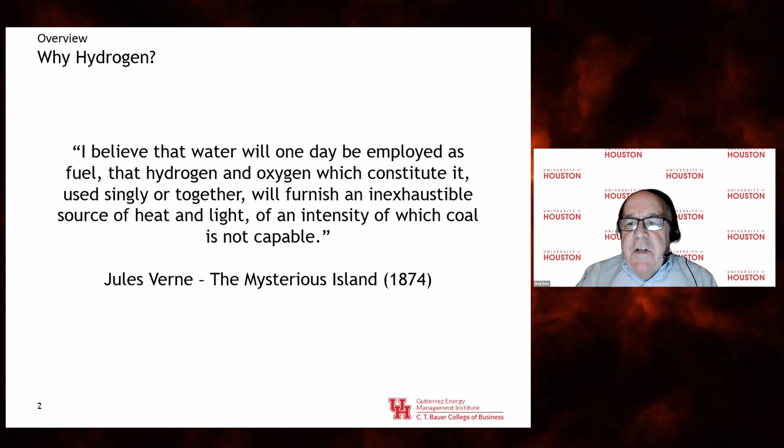Perhaps if I could ask if the mic in the room could be muted. Great, thank you very much.

So what is it about hydrogen that really drives our interest? It's obviously a very unique element. Its combustion process is very clean, producing only heat and water. It has a very high specific energy content, three times the energy content of gasoline by weight. That really drives our key interest in hydrogen, as its value as an energy carrier in parallel with electricity, and also as a storage medium.

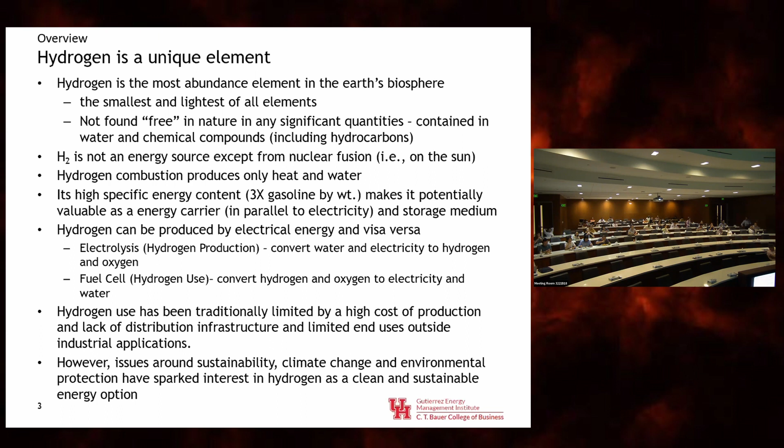One of the great things about hydrogen is it can be produced by electrical energy and vice versa. We can produce hydrogen by electrolysis, converting water and electricity to hydrogen, and then we can also convert hydrogen and oxygen to electricity via fuel cells.

So our interest in hydrogen has been... I'm sorry, is it possible to mute the mic in the room?

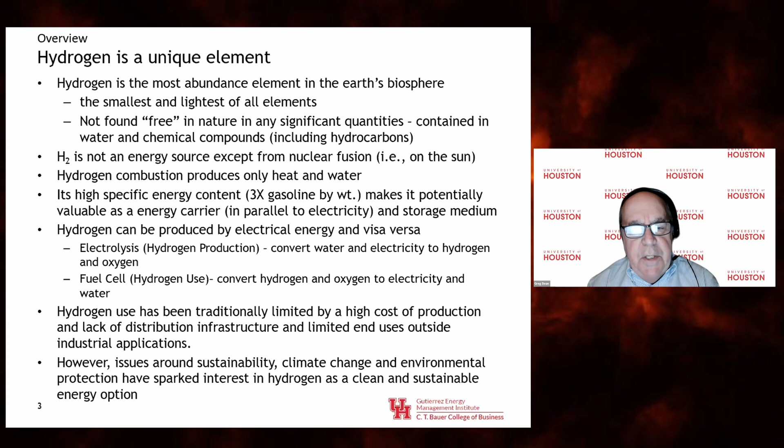It's been traditionally limited because of its very high cost of production, but now with interest in sustainability and climate change, we've come to focus on what role hydrogen could play. In terms of an overall role in a low or zero carbon energy world, we can talk about the full value chain for sources of hydrogen, whether zero carbon so-called green pathways, or blue hydrogen production from fossil fuels with carbon capture.

Energy storage and transportation are very important. Hydrogen can be moved and stored in a number of different ways, in different physical forms of hydrogen, as well as different hydrogen-derived energy carriers like ammonia, methanol, etc.

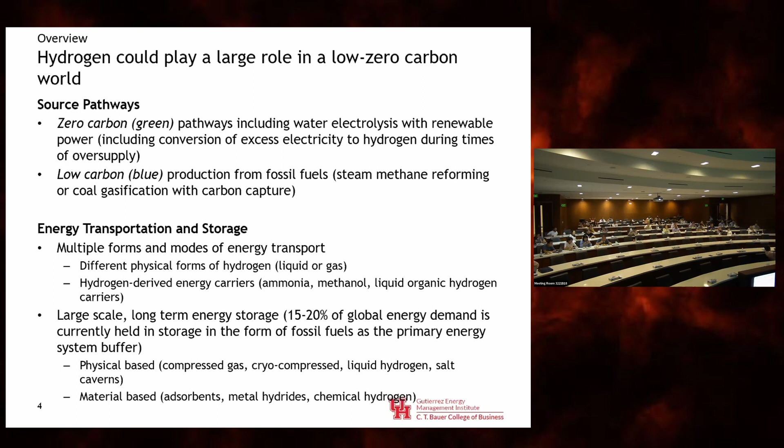One key important aspect of hydrogen is its potential role in long-term energy storage. One of the beauties of fossil fuels is that they are very energy dense and easy to store and move around. In fact, about 15 to 20% of global energy demand is currently held in storage in the form of fossil fuels as the primary energy system buffer. So as we move away from fossil fuels, we need other methods to transport and store hydrogen.

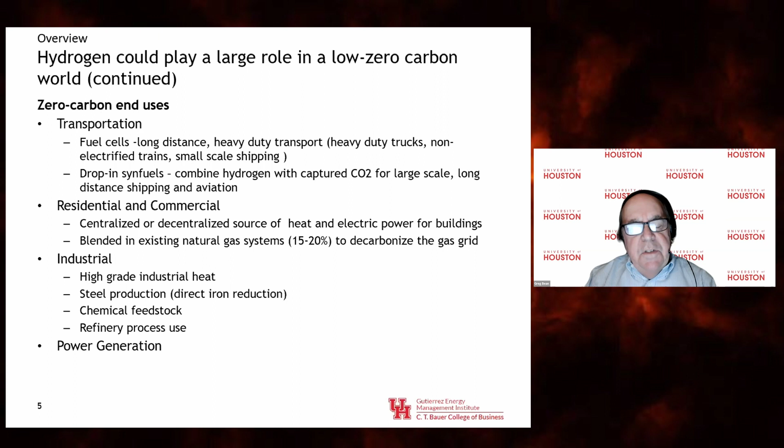We also need to think about the back end of the value chain, the different zero carbon energy uses. Part of the infrastructure has to be the introduction of devices that will use hydrogen in various sectors, whether transportation, potentially residential, commercial, industrial applications, particularly high heat and heavy energy intensive industries, as well as a potential role in power generation.

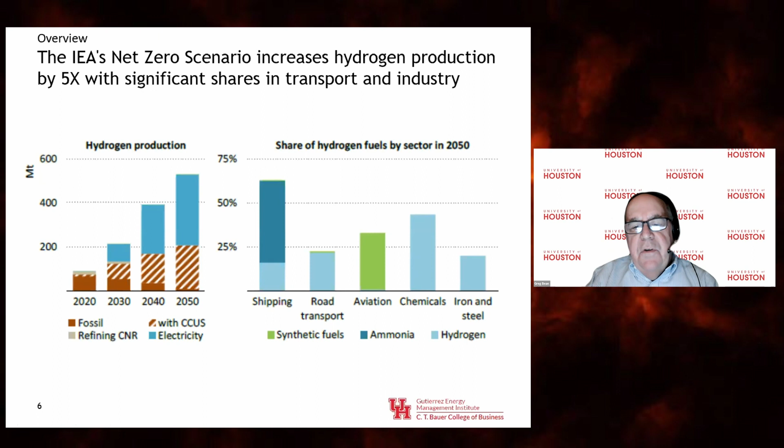Obviously the future role of hydrogen is somewhat uncertain, so it can be helpful to think about that in terms of scenarios. This is the IEA's net zero scenario, where they project an increase in hydrogen production of about 5x over the next 30 years, with significant penetration in transportation and industry, both in transportation in terms of shipping, heavy-duty road transport, aviation, and in industry, especially chemicals and iron and steel. We're going to need some technology development.

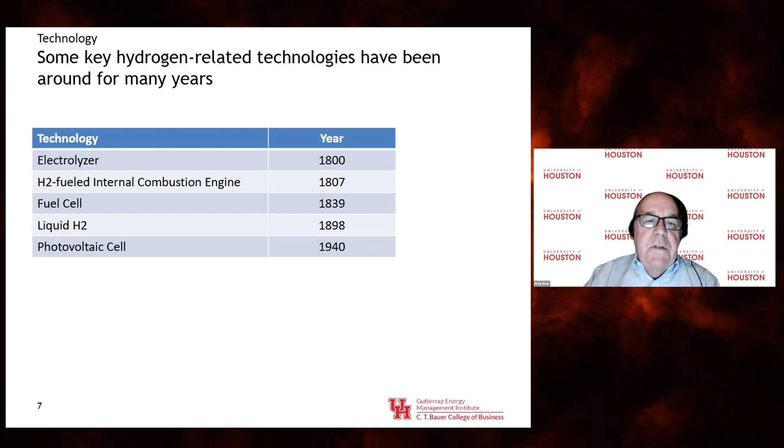The good news is that a lot of the hydrogen-related technologies that we need have been around in early forms for many years. We list some of these here, things like electrolyzers, fuel cells, and even PV cells for solar power for the electrolyzers. So while these technologies have been around for a while, they have not been really developed and applied at scale, which is the task that we have before us.

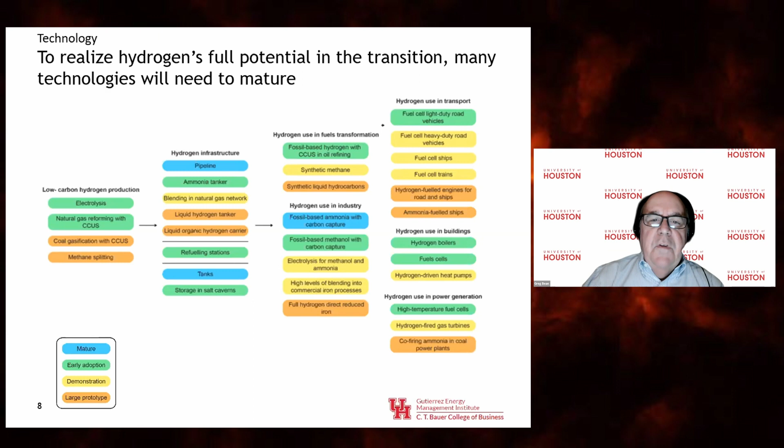You can see going on the value chain from left to right in terms of production, infrastructure, and then the different aspects, the different investments that we need and the different technologies that we need in terms of the various potential uses of hydrogen.

When we talk about hydrogen, people tend to talk about different colors of hydrogen - gray, blue, or green - but I think increasingly people are going to focus much more on the carbon intensity of the hydrogen: how many kilograms of CO2 equivalent are incurred to produce a kilogram of hydrogen.

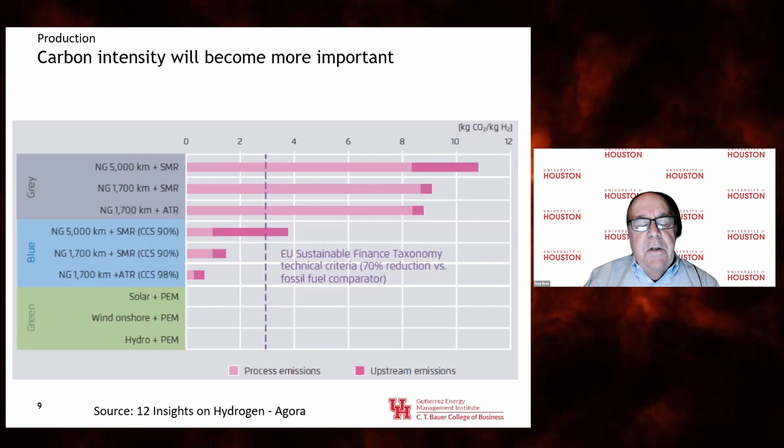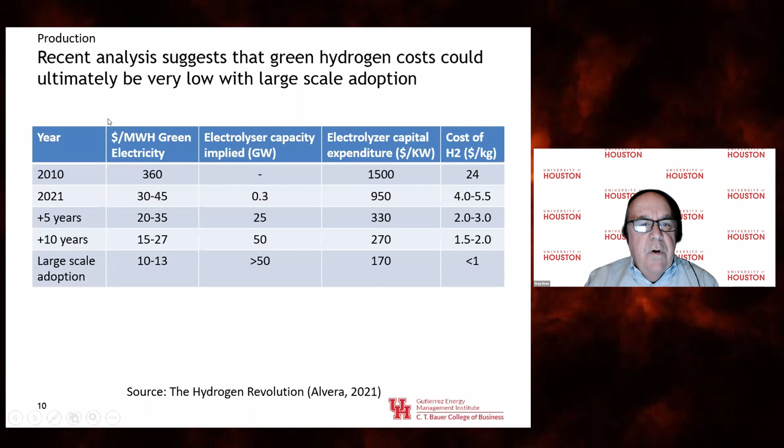There's been a lot of development and thinking about how cost might evolve. This is some interesting analysis done recently, which suggests that as we move over the next 20 to 30 years to large scale adoption of green hydrogen produced by electrolyzers, the capital cost and hence the implied cost of hydrogen could drop very dramatically from $4 or $5 a kilogram today to potentially $1 a kilogram or even less with very large adoption.

When we think about the demand for hydrogen, there is potential demand in all of the end use segments, but hydrogen will probably find its best markets and penetrate more highly in the more centralized applications where it will have some advantage versus electricity. When we think about the new low carbon, zero carbon world where we're moving from the use of fossil fuels to primarily electricity and energy use, either through electrification or hydrogen, we then need to look at which solution is likely to be best.

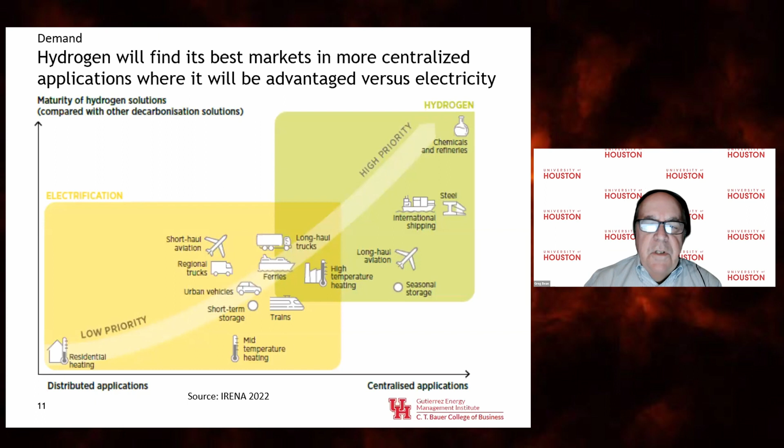As we can see here, the focus for hydrogen is on some of the transport sectors as well as the industrial sectors. We see probably less use in buildings and in light-duty transportation, particularly light-duty transportation, where the relatively lower efficiency of well-to-wheels of hydrogen versus electricity and battery electric vehicles means there probably won't be too much penetration there.

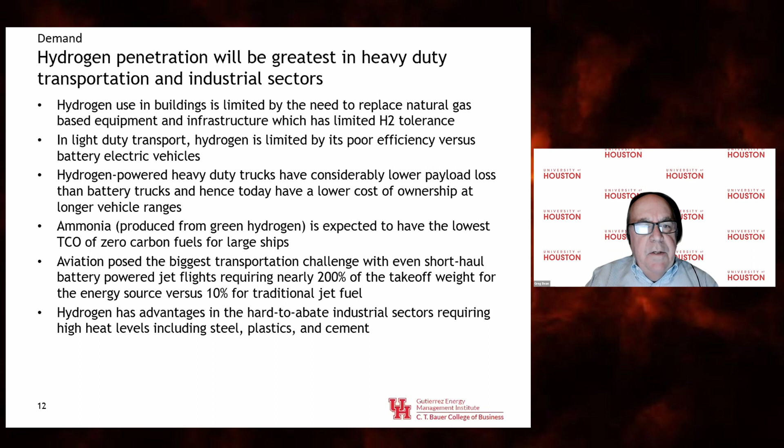But where we will see the penetration, where we will need the infrastructure, is in the heavy-duty transportation subsectors, whether that's heavy-duty trucks, shipping, aviation - which is probably the single biggest challenge that we have given the energy requirements and weight restrictions associated with fueling aviation - as well as in the hard to abate industrial sectors.

So we've got production of hydrogen, we've got demand in different sectors, and we expect that hydrogen trade will evolve. Regions that have low potential hydrogen costs and small populations and potentially small demand centers will be in a position to export, and depending on their renewable energy resources, be they solar or wind, would be in a position to export hydrogen to countries that will be short of renewable energy capacity.

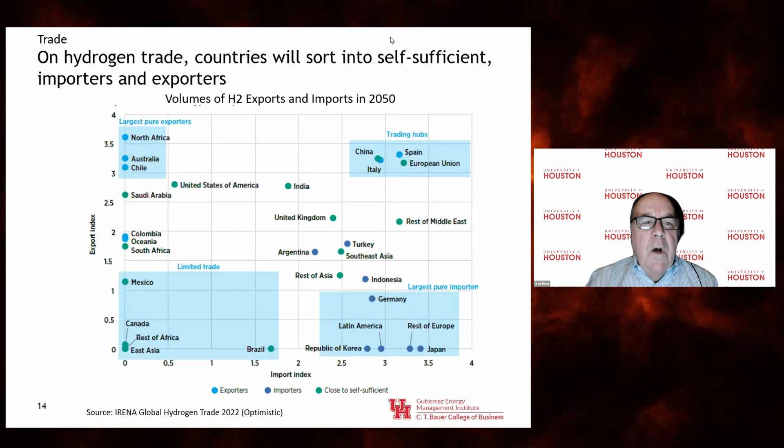This is an initial estimate that IRENA has done earlier this year on where the exporting regions might lie, where the importing regions might lie, and where other aspects might be somewhere in the middle. It's very early days to be estimating not only supply demand, but then obviously trade between importers and exporters. But this is a first pass at seeing how an international trade regime might evolve for hydrogen.

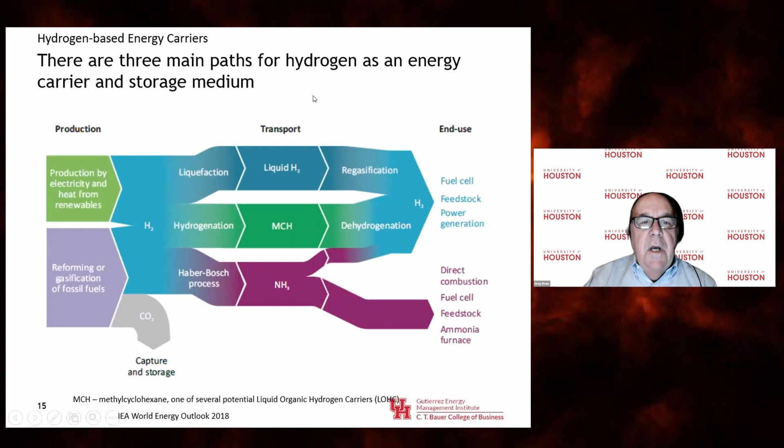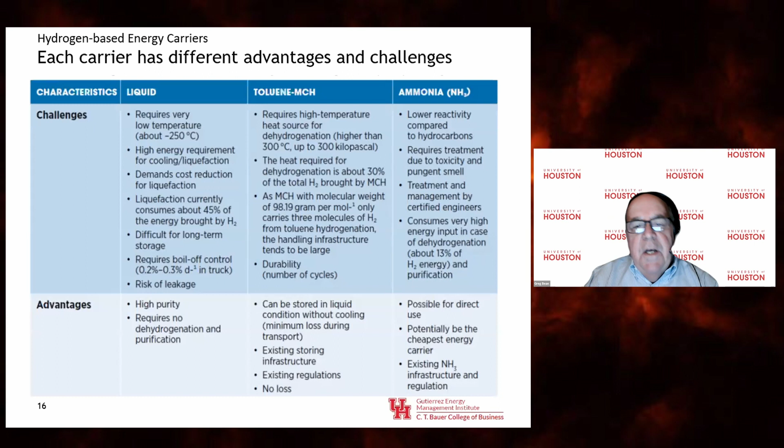When we talk about hydrogen and its role as an energy carrier, it's important to think about the fact that there are a lot of different ways that we can use hydrogen or hydrogen-derived compounds as energy carriers and storage mediums. Some of the big ones are liquefaction of hydrogen, hydrogenation of liquid organic hydrogen carriers, or ammonia. All three of these are potentially available for long-distance transportation of hydrogen energy. They each have different advantages and challenges, as you can see here.

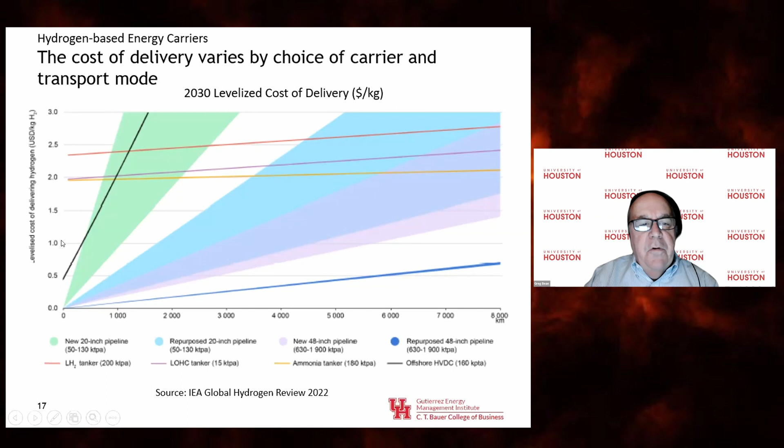The cost of delivery of hydrogen from an exporting environment to an importer would vary by the choice of carrier and transportation mode. You can see here estimates for different pipelines and different types of hydrogen carrier tankers.

One important thing to think about with hydrogen-based energy carriers is what energy is available after transportation and conversion. Starting with energy consumption at the production source, we have to account for conversion, shipping, and potentially reconversion. You can see what some of the penalties are for different hydrogen carriers.

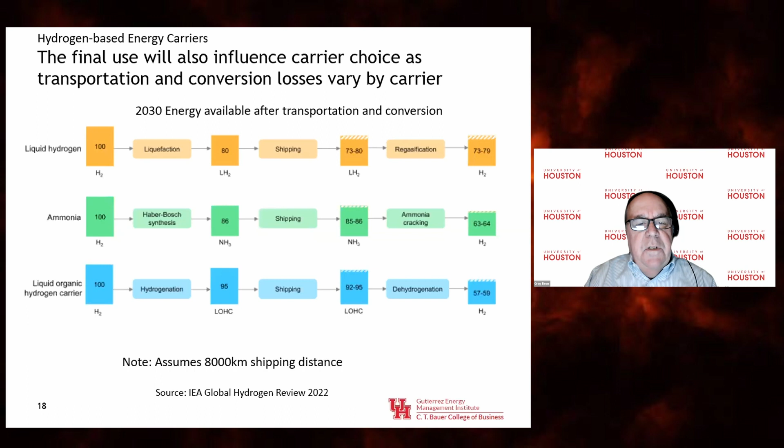This is done on a pro forma basis, assuming an 8,000 kilometer shipping distance. You can see energy consumption in the various aspects of moving the hydrogen or hydrogen carrier from production source to demand center. The energy conversion losses are very important.

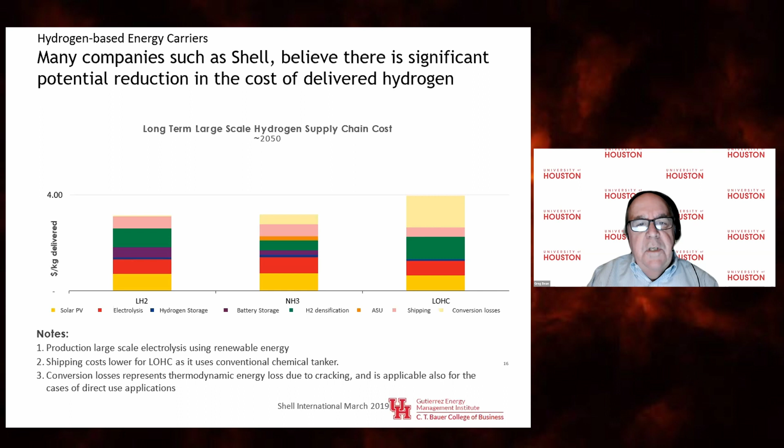Many companies, like in this example of projections by Shell, believe the cost of integrated value chains will drop significantly, enabling delivered hydrogen. This example from Australia to North Asia, likely Japan, is a couple years old, and estimates delivered cost of hydrogen below $4 a kilogram, which would be a significant reduction from today.

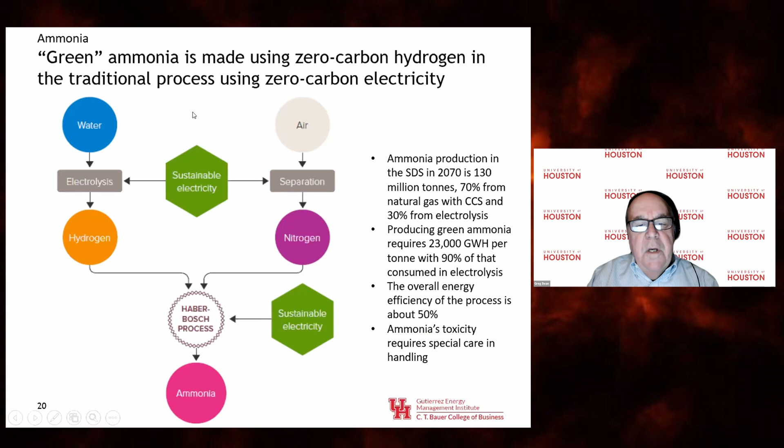It's important when we talk about hydrogen to remember we can also include green ammonia in that process. Starting with zero carbon hydrogen produced by electrolysis, we can use it with the traditional Haber-Bosch ammonia production process and nitrogen from air separation to create so-called green ammonia, which can be a very effective hydrogen energy carrier. What's interesting about ammonia is it can be used in many applications directly.

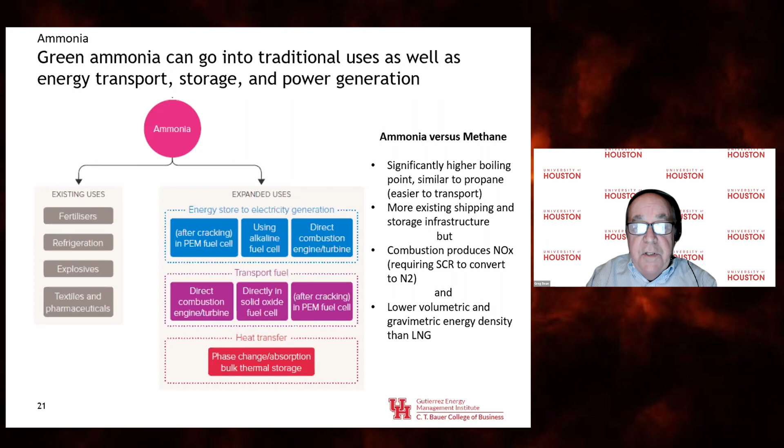You don't necessarily have to crack it to extract the hydrogen back out. At the end use location, in many cases we can actually use the ammonia directly as an energy source.

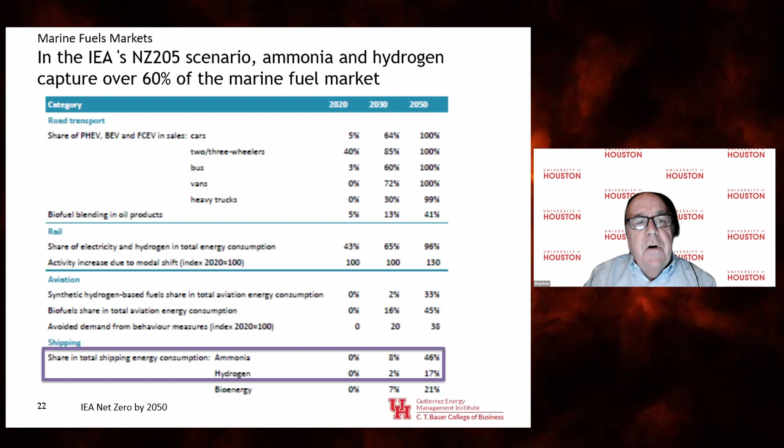This is a bit of background on a couple of sub-markets. This is the IEA's Net Zero 2050 scenario and their assessment of what the marine market might look like. As you can see, whether in the form of ammonia or hydrogen, they're projecting that hydrogen-derived fuels would have a significant market share in the shipping industry.

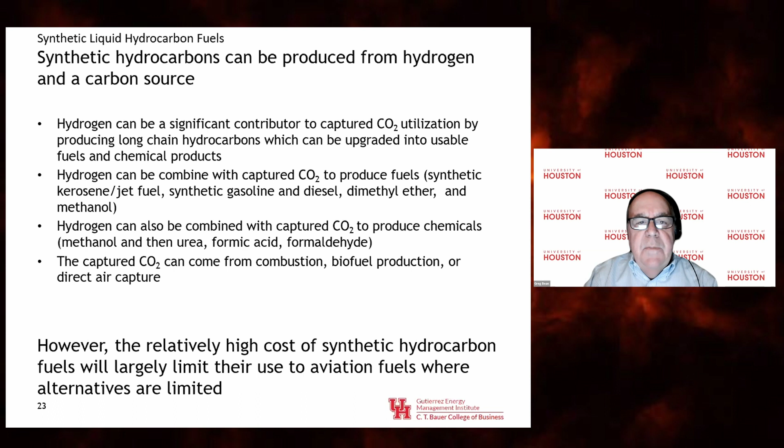There's also the possibility of producing synthetic hydrocarbons from green or blue hydrogen and captured CO2. However, this is likely to remain a very expensive way to produce synthetic hydrocarbons, and is probably likely to be limited pretty much to aviation fuels.

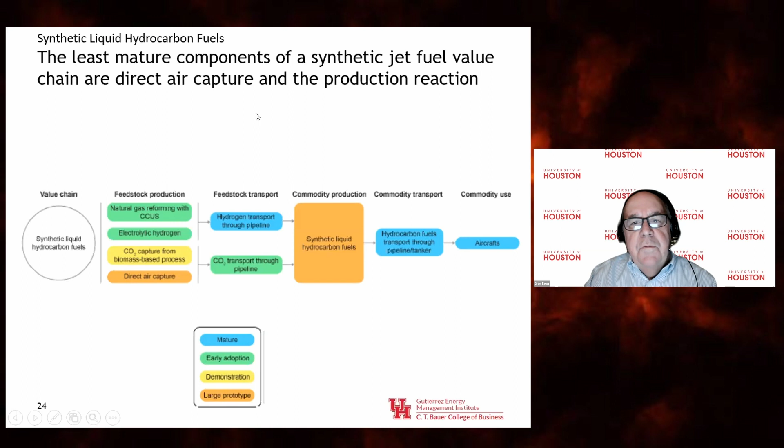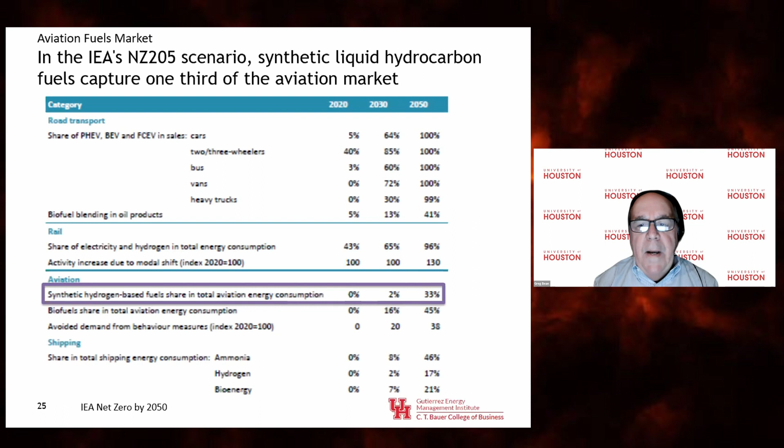You can see the technology readiness of the associated components of a synthetic fuel, jet fuel value chain. The IEA's projection in Net Zero 2050 shows synthetic hydrogen-based fuels, those are synthetic jet fuels produced from green hydrogen and captured CO2, would have about a third of the aviation market, with much of the rest done by drop-in advanced biofuels, and a small amount of petroleum-derived aviation fuels remaining even in 2050.

Finally, in addition to ammonia and synthetic liquid hydrocarbons, we want to talk about methanol as an energy carrier. Methanol is currently produced very broadly around the world and moved primarily as a chemical feedstock, but it also has fuel uses, particularly in China. Methanol is potentially a green energy carrier where we produce it from captured CO2 and green hydrogen.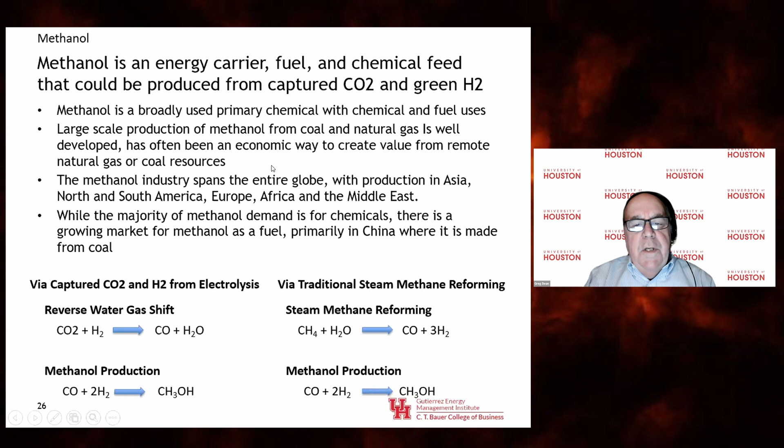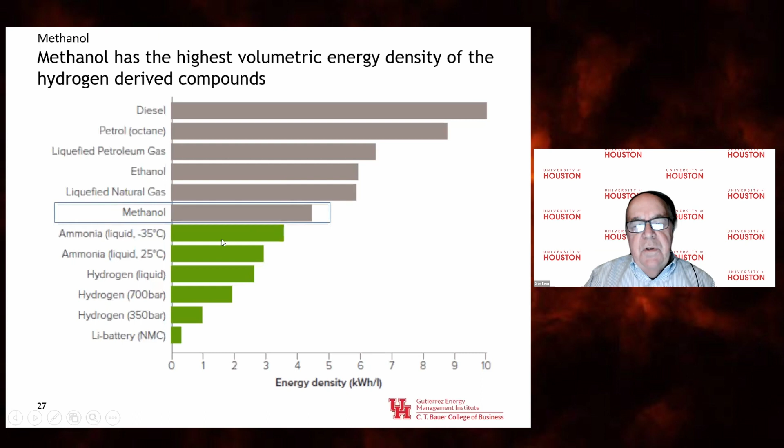Methanol is interesting, particularly for a lot of shipping people, because it has the highest volumetric energy density of any of the hydrogen-derived compounds. You can see the challenge in trying to replicate liquid fossil fuel volumetric energy densities with the various hydrogen-derived energy densities.

But to make truly green methanol, we need biomass-derived CO2 and green hydrogen, so it's a more complicated operation to produce truly green methanol. That's basically to offset the CO2 produced when the methanol is burned, unlike burning either pure hydrogen or ammonia, which is carbon-free combustion.

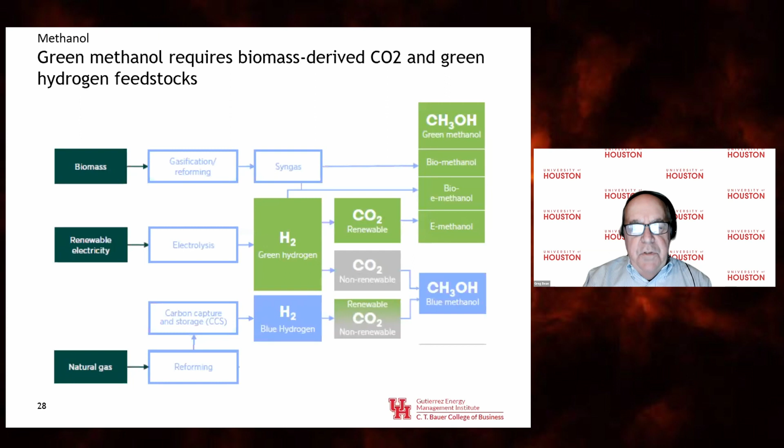So this is of interest to a number of shipping companies who are trying to figure out if they can create a kind of integrated biomass methanol value chain. In summary, hydrogen could play a large role, potentially 15 to 20% of energy demand.

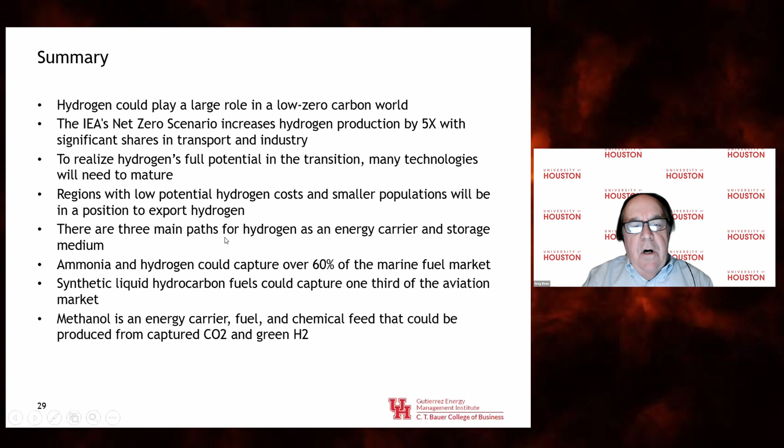We would have to have a significant increase in production, a lot of technology development, but there's a lot of optionality with hydrogen in terms of how it's produced, how we convert hydrogen to different energy carriers, and it has a significant role in a number of end-use demand segments, particularly some heavy transportation segments and hard-to-abate industrial segments. So I'll stop there.

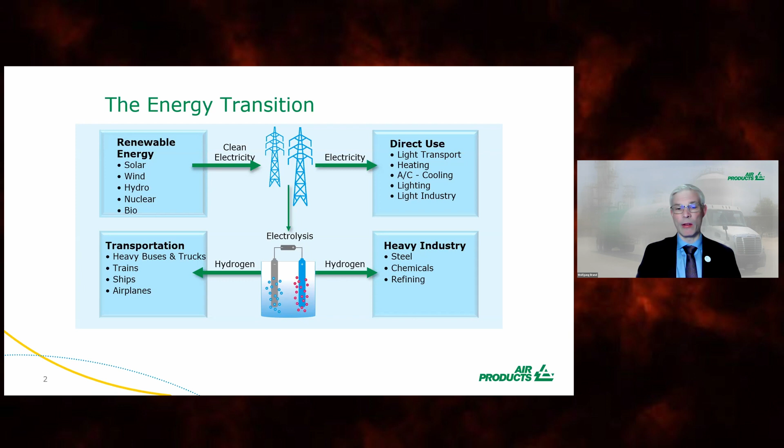Like Greg outlined before, this is a transition from fossil fuels-based energy systems into a new world of renewable energy. Yes, there will be a lot of direct use of electricity, and this is good, and the world needs that. But there will be elements that can't be directly electrified, and then we need another means of energy carrier. Hydrogen is the most promising energy carrier we have today, in particular for transportation segments—heavy buses, trucks, trains, ships, airplanes—and heavy industry that needs a lot of energy, where hydrogen would be the solution.

The whole journey is a transition, so it will not happen overnight. It will happen at different speeds and in different geographies, but we are absolutely convinced the world has decided to stop burning fossil fuels. In 20, 30, 40 years, this is not going to happen in any region of the world anymore. This is why we need to do what we are starting to do now to change the world's energy system.

Greg, I really liked how you formulated that point, that we have these four colors of hydrogen—gray, blue, green, and other colors in the game. But at the end of the day, we had different shades of gray, and now we have different shades of blue and green. So it's better to talk in an academic environment about carbon-intense hydrogen and low-carbon hydrogen.

Traditional hydrogen, as we have it today, comes from fossil fuel-based systems—of course the classic steam methane reforming or the ATR process—but there's also gasification, which is already an enhancement when you look at the overall use of energy, because we're using something at the low bottom of the energy value. It's coal that can't be used, or even residual oils, and that gets gasified into hydrogen, a clean means of energy at end use.

It's still gray, it's carbon-intense hydrogen, but it's already a step forward. Blue, as Greg explained, is producing hydrogen with carbon capture and not releasing carbon dioxide to the environment, and green is producing hydrogen from renewable energy sources.

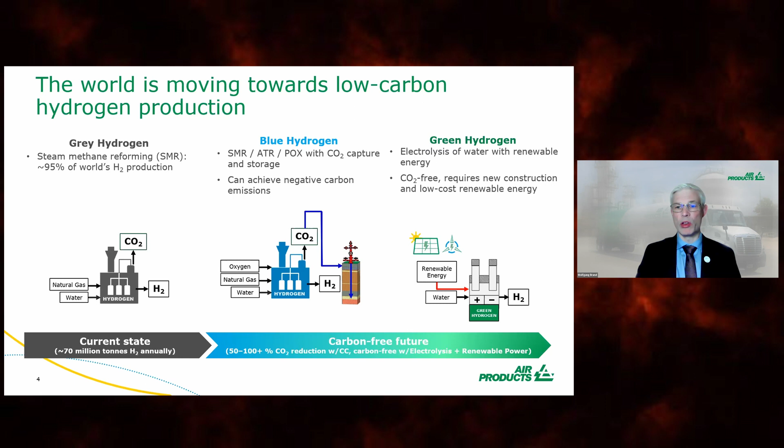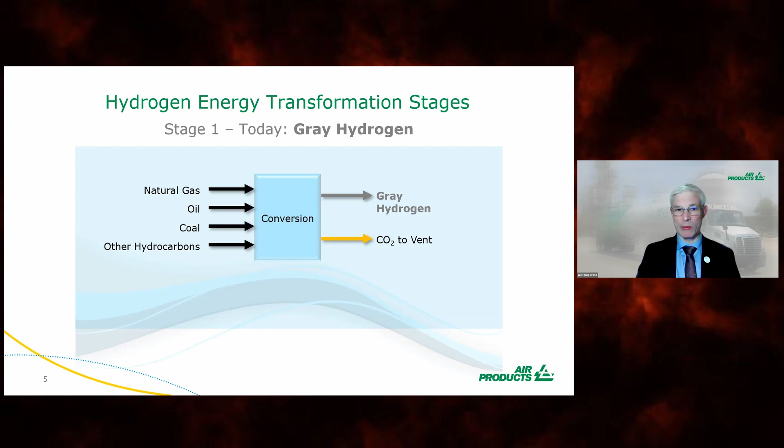Gray is what we have today. Today we already have a hydrogen system, largely used in pockets in industry, not yet as a broad energy carrier. But that's starting to change, because the hydrogen business is picking up, and going forward we will also need gray hydrogen. Will it be there in 30 years, 40 years? I can't tell you the future, but for now we will have an important share of gray hydrogen.

This is where Air Products is, in total capacity, number one in the world. We have over 110 hydrogen production facilities around the world, and we produce over 8,000 metric tons per day of hydrogen all over the world.

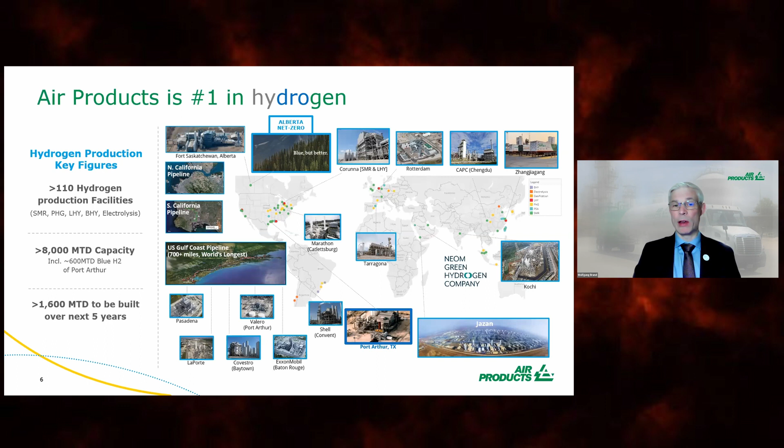This will now change dramatically when we add more and more capacity, in particular in the field of green and blue. And this brings me to the next stage, to tomorrow. And tomorrow starts really tomorrow, not in 10 years, not in 20 years. For Air Products, it starts tomorrow. We are already working heavily on a few projects in that blue area.

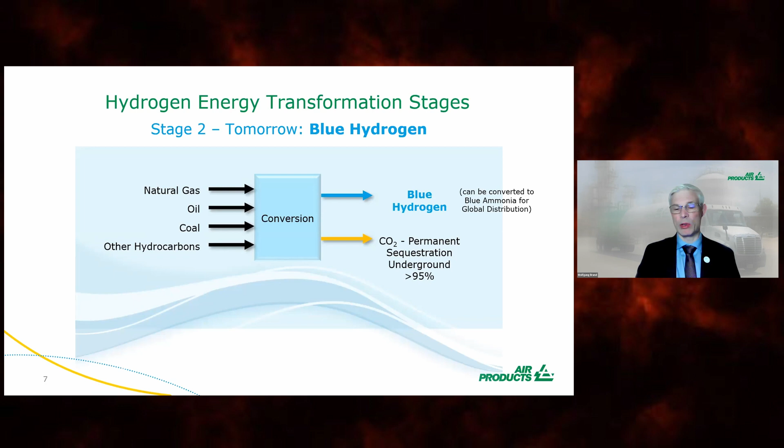This is when you produce hydrogen and sequestrate the CO2, so you don't emit greenhouse gases, in particular CO2. A very good example of that is the project we are doing in Canada. We have announced that project, and it is in full swing and execution. We are producing a net zero energy complex, including an ATR, an autothermal reformer, to convert natural gas into hydrogen. We have more than 95% carbon capture in the process.

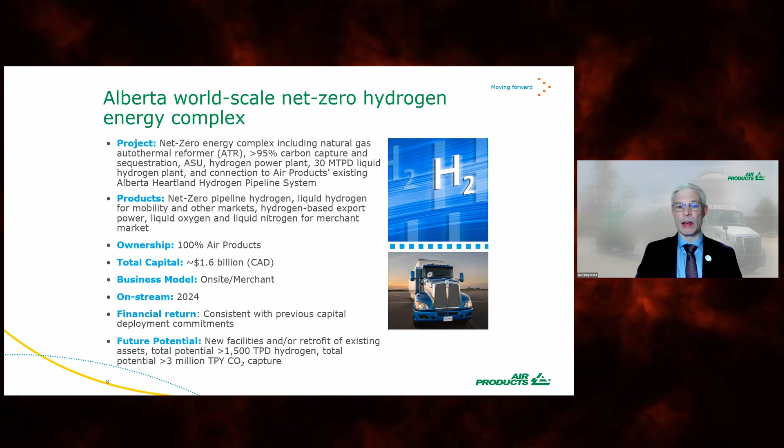Now you may ask, why net zero? I will explain on the next slide why technically we are net zero, even if we have some carbon dioxide still leaving the plant at that point. We have a liquid hydrogen plant connected to it, connecting to an existing pipeline system. The total capital we invest is around 1.6 billion Canadian dollars, and we will be on stream by 2024. Here's a schematic of what we do here in Alberta.

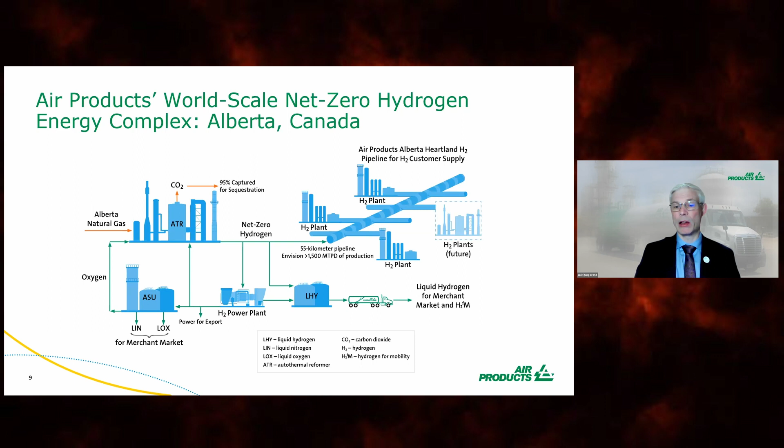Only with availability of infrastructure will that customer base automatically grow, because we have to turn away from the fossil fuel-based energy system. So in Alberta, we have a pipeline and a liquefier to transport liquid hydrogen for the merchant market and to our fueling stations for hydrogen for mobility.

We have another good example, also recently announced in Louisiana. There, we are building a very large natural gas-based hydrogen production plant that is also completely sequestrating the carbon dioxide—that is blue hydrogen in terms of color. We are producing 750 million SCFD of blue hydrogen and have an ammonia plant where we can support hydrogen for the local business, including a 700-mile long hydrogen pipeline that already exists, which Air Products owns and operates. And we can produce ammonia, and with that ammonia, like we heard from Greg, we can transport over vast distances. That's the beautiful thing with ammonia, it doesn't really matter if it's short or long distance.

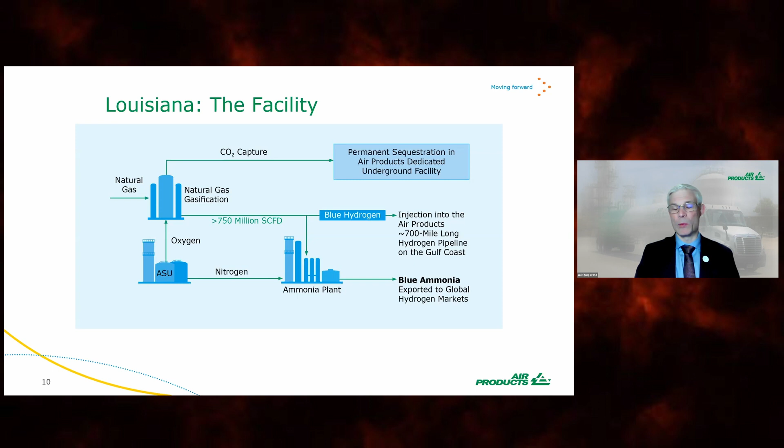We can transport it to global markets. The pipeline is instrumental—we are talking about hydrogen infrastructure. With a pipeline, you're transporting molecules, and molecules by definition are color agnostic. They are not green, they are not blue, they are hydrogen. So it's all about getting it right in terms of certification. When you produce blue, when you produce green, the customer can rely on a system that is not cheating, a system that is reducing the carbon footprint more and more until we are completely at net zero.

But a hydrogen pipeline, like hydrogen storage, is instrumental in doing that mass balancing around that color game, in particular in the transition phase.

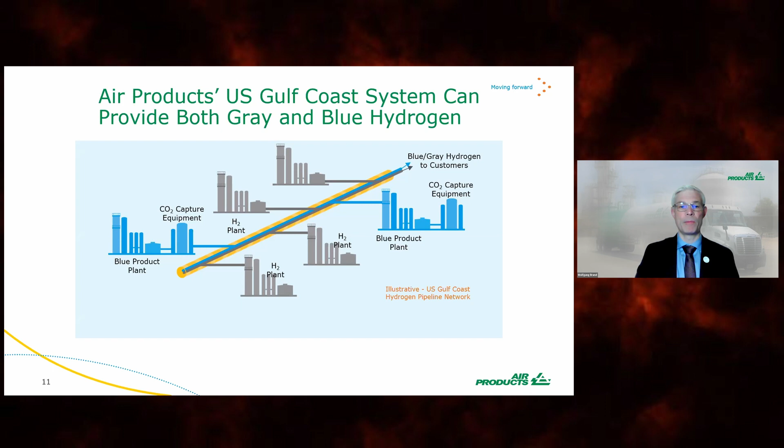Now coming to the thing that is dear to my heart, the last 2.5 years I have developed and started to implement the NEOM Green Hydrogen project. This is an exciting journey. A lot of people talk about green hydrogen and think of it as just putting an electrolyzer somewhere and producing hydrogen. This is technically true - you need renewable power and an electrolyzer, and then you have green hydrogen. But to really develop the infrastructure for green hydrogen is something way beyond that simple.

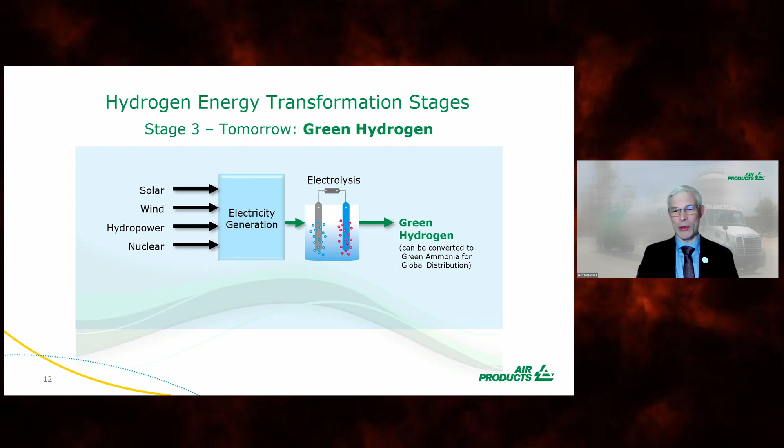Producing green hydrogen, no carbon footprint at that moment. We are also powering our air separation unit with green power, no carbon footprint at that process step. We produce nitrogen. Hydrogen and nitrogen in the Haber-Bosch process goes to ammonia production, again powered by renewable power, so this is also carbon-free ammonia. Then Air Products, the global company, is the sole off-taker of each and every ammonia molecule produced by NEOM Green Hydrogen Company, and we will ship it.

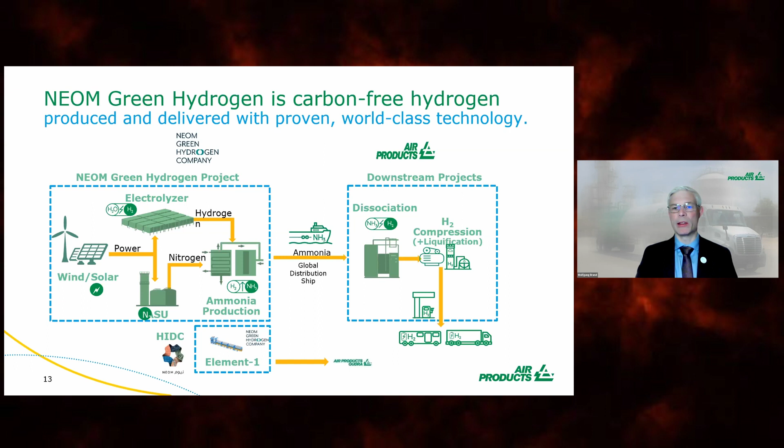Just in numbers, the project is stunning. We have announced that the project costs more than 5 billion. We have 5 significant key contracts to manage, all above $500 million US. The plot area for process, solar and wind - in particular the wind farm - is vast. It's 400 square kilometers. And that's all of them.

We're talking about building a hydrogen infrastructure. How many NEOM green hydrogen projects will the world need? Many, many - look at those numbers. This will be a challenge for the world to build enough wind and solar. We expect on our project more than 10,000 laborers at peak with 41 million work hours at site, also coming with all their safety challenges to deliver that safely without any lost time incident.

We have more than 3 million hours on engineering and 3.5 million hours to supervise the sites. Our sites are not all at the same place - we are all in the NEOM region, but they are connecting between the wind farm, the solar farm, and the process plant with distances more than 150 kilometers with overhead transmission lines. A lot of engineering documents, steel and concrete, of course.

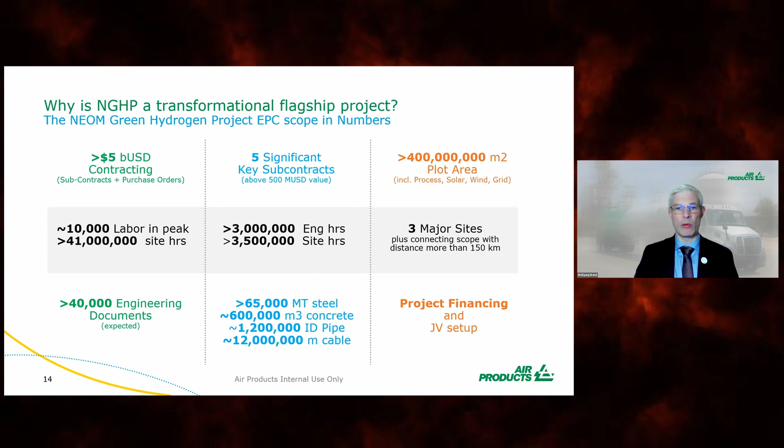The project is developed as a financing project and has a joint venture setup I explained before. On the downstream side, receiving the green ammonia, we are shipping to Europe, United States, and Asia. A typical port project always looks like a Lego system - you have different building blocks. What is shown in purple here, you always have to have marine facilities and ammonia storage, because we need to offload the ammonia and store it for continuous processing.

There may be the option to transport ammonia, like with trailers or barges, into other hubs in that region. Or we continue into processing with what's shown here as an ammonia cracker, the dissociation process to convert ammonia back to hydrogen. Then, as I explained before, you either go to a pipeline and compress it to high pressure hydrogen, or put it directly to the customer with a refueling station, or liquefy it if you have mid-distance transport.

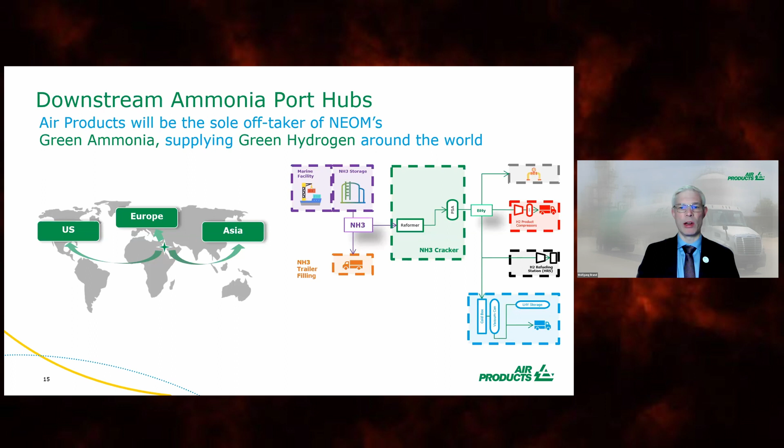NEOM is really happening, not only the generation plant in Saudi waiting for customers. NEOM is happening on the low carbon hydrogen for Air Products for the world. We have announced already 3 terminals in Europe: the Immingham ammonia terminal in the UK, the Rotterdam ammonia terminal in the Netherlands, and just a week ago, a terminal in Hamburg, Germany. All these projects will be developed and will receive our ammonia from NEOM.

So hydrogen for mobility is our primary destination for our products. We're not excluding industrial customers, but to accelerate the energy transition for the world, we believe we have to break that chicken and egg problem for the mobility sector. Hydrogen for buses and trucks and beyond is the solution of the future.

We have decades of hydrogen production and distribution experience, which is a game changer when working with customers. We are developing the global infrastructure to support our customers, and we provide safer, more reliable and cost-effective solutions. You always have to understand that hydrogen and ammonia are not inherently safe. They are safe because we make it safe. We are also walking the talk.

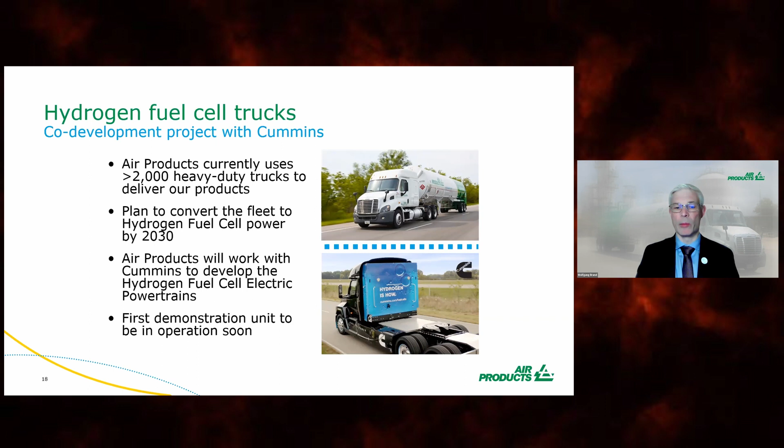While we are developing together with our customers their transition into a hydrogen-based system, we ourselves are one of the largest trucking companies in the world. We have more than 2,000 heavy-duty trucks around the world to deliver our products, our industrial gases. We have committed to convert this fleet by 2030 to fuel cell-powered, hydrogen-powered vehicles. We're working on the first conversions, and the demonstration will be in operation soon.

To sum it all up, we're talking about building the hydrogen infrastructure. Air Products is doing that, has been doing that for decades. But now it's getting more important for the world in terms of low carbon hydrogen. We are the global hydrogen leader. We have the expertise and investment to span the full supply chain.

We are now in a first mover position for large scale carbon free hydrogen, as we've proven with the project we are working on. And we are partnering with our customers on their sustainability journey, wanting to be the provider of choice for blue and green hydrogen solutions to address the significant challenges of the energy and environmental transition.

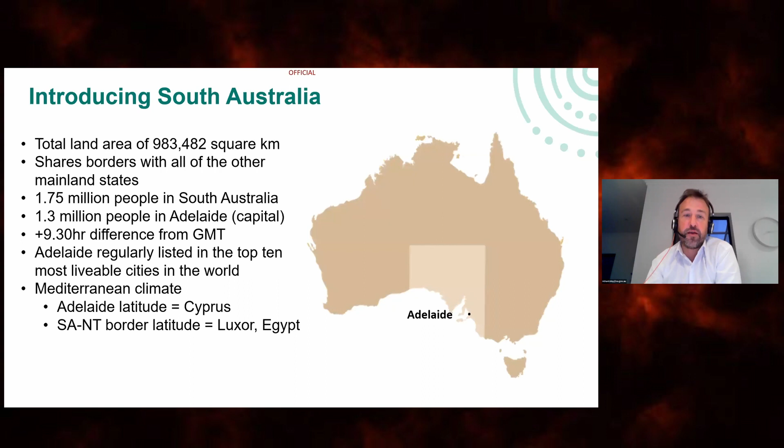It's hard to talk about hydrogen without talking about clean energy transformation. So my talk today will talk a bit about South Australia's journey, particularly around electricity, but then what we've been doing in hydrogen and where we see things heading in the future.

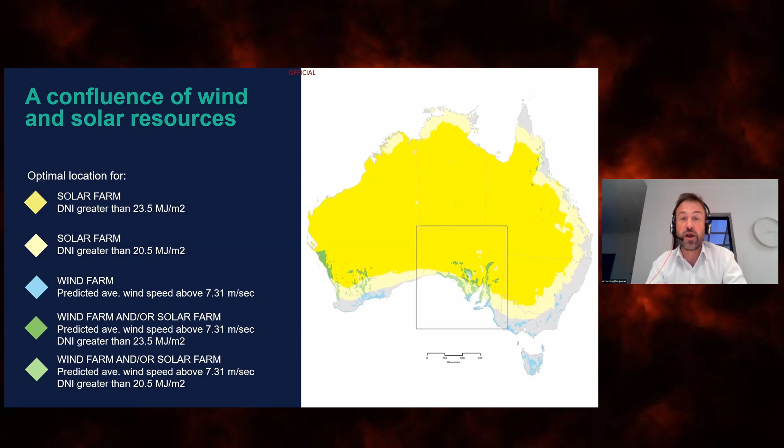Probably worth acknowledging South Australia. We've been very blessed with a confluence of world-class wind and solar resources. The map shows three grades of solar resource across Australia, with bright yellow being the best irradiance, light yellow the second tier, and grey the third tier. Areas suitable for wind generation, above 7.3 metres per second average wind speed, are in blue, and where strong wind and strong solar resource overlap, we've coloured them green. You can see large areas of land in South Australia with coincidental wind and solar, a little the same in Western Australia, and to a lesser extent in North Queensland.

This was a quote from the former director of energy within Tesla: South Australia is a window to the future for energy system transformation. So why is that?

Traditionally, we were very much a coal, gas generator and a net importer of power. Over the first part of this millennium, we saw steady growth in wind, large-scale wind farms, rooftop solar, and utility-scale solar. In 2016, our last coal-fired power station exited the system, and today we're very much a wind, solar, gas state and a net exporter of power.

We've been setting new records along the way. In December last year, for that particular month, we were 79% renewable energy generation, and across the last 12 months we've been around 68%.

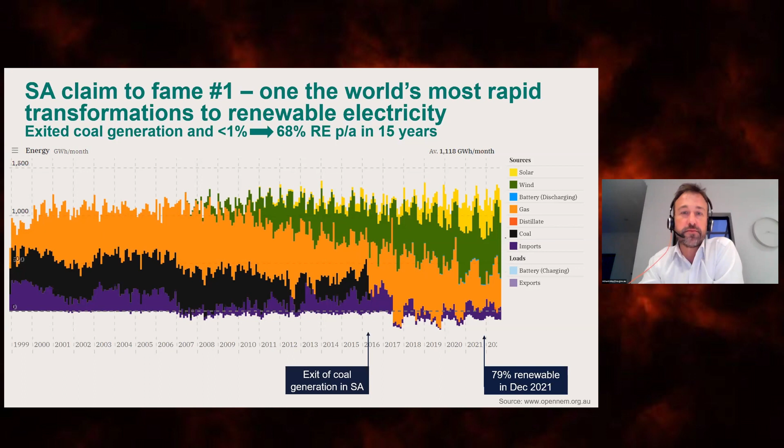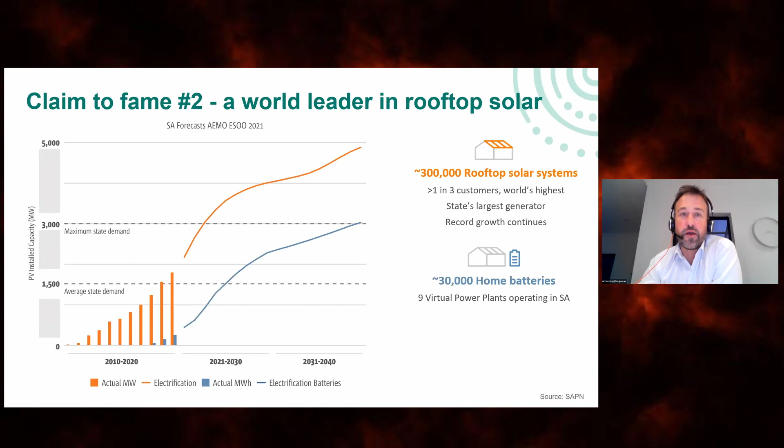One of the other interesting things about South Australia, and similar to many other Australian states, is we've seen very strong uptake in rooftop solar PV - the rise of the prosumer, to the point now where South Australia's rooftop solar fleet is bigger than average state demand. Over 300,000 customers, around 40% of homes, on average over 1 in 3 customers across homes and businesses. We're starting to see similar uptake charts in terms of home batteries, making us one of the world's most distributed electricity systems.

Probably the third and final key point of interest is really the successful integration of that world-leading share of variable renewables. We don't have any hydro generation here, there's no nuclear, and as I said, we've exited coal. So very much wind, solar, and gas is where we're at now.

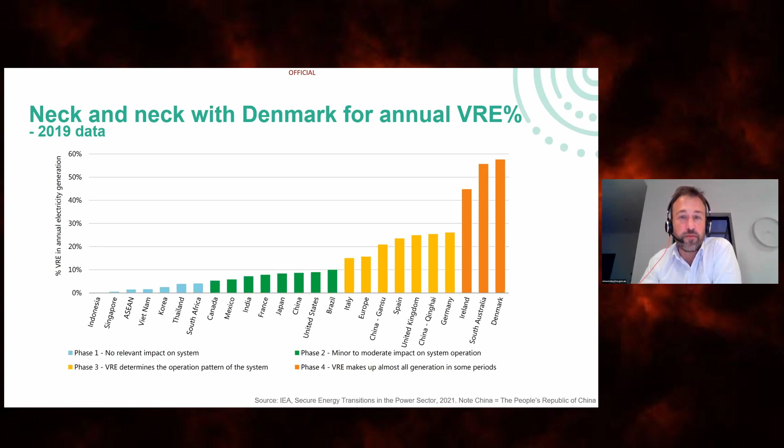Just to round out that, in terms of successful integration, I think there's probably 4 kinds of technologies that have been particularly key. I think grid scale batteries have been key.

Home batteries and VPPs have been really key. Synchronous condensers have been very key to providing system strength and inertia into our system, to replicate the sorts of power system services that other large spinning generators would provide. And fast gas, where speed - you can imagine the ramp rate in the evening as our solar's dropping off and the gas fleet needs to ramp up quickly - speed becomes more important at that point than overall efficiency.

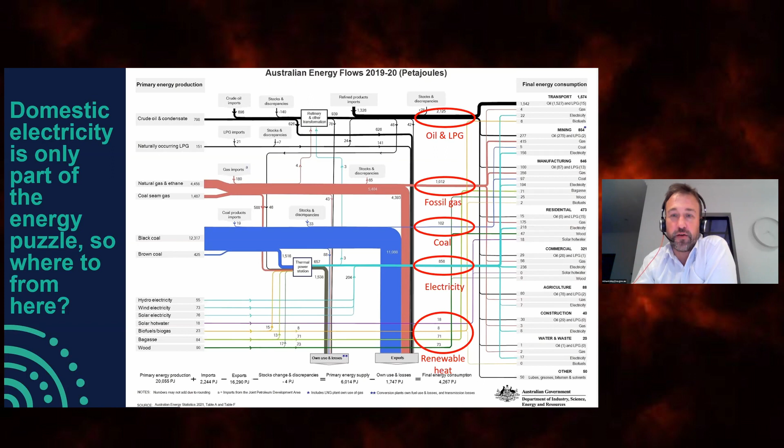This is a bit of a Sankey diagram, and I'm happy to make these charts available to the organisers. The point of this one is this is Australia's energy flows. The key takeaways here are, we're big importers of oil, we're big exporters of coal and natural gas. In terms of our domestic use, which is the lines circled there in red, electricity is certainly only part of the story. So there's a lot of transition still to go.

I think this probably aligns pretty well with Greg and Wolfgang's point - really the future looks like green electrons and green molecules going forward. We certainly see that electrification and, if I can use the term, hydrogenification, can really underpin the complete decarbonisation of our economy and ultimately lead to low carbon exports.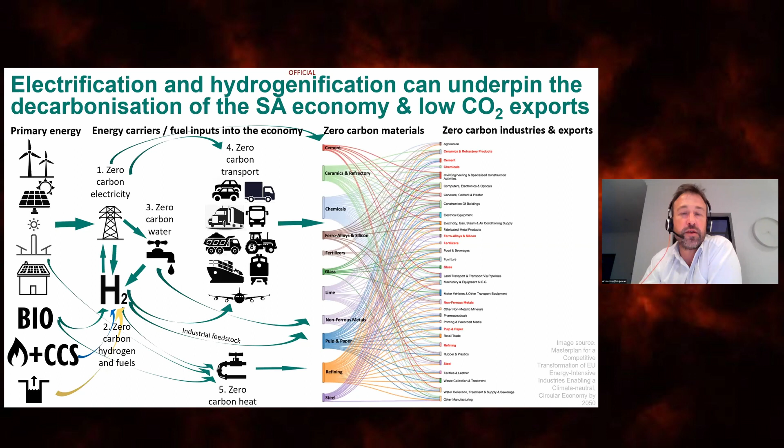So what are we doing - quick overview, we are obviously pushing into EVs. It's worth it in terms of electrification as a state. We're focused on rolling out statewide charging networks, looking at getting the settings right on when and where people charge their vehicles. There's incentives to purchase EVs and working with fleet owners. So there's certainly a key focus on EVs, but also a very strong focus on hydrogen.

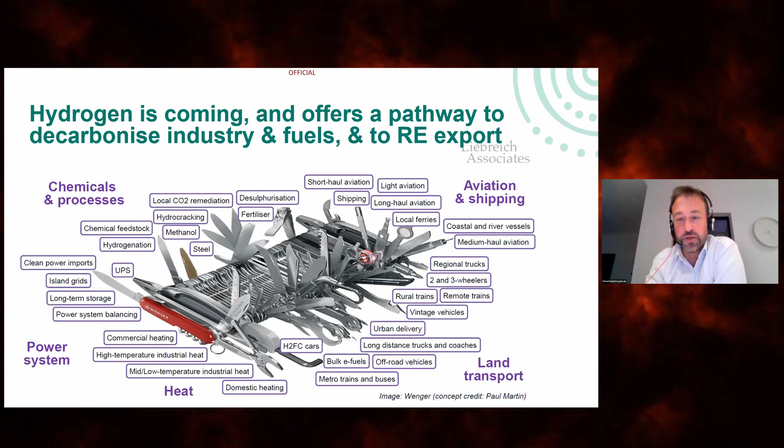I'm borrowing here from Michael Liebreich, founder of New Energy Finance, Bloomberg New Energy Finance, and this is an analogy he's developed around hydrogen as a Swiss Army knife - it can do many different things. But the key analogy of the Swiss Army knife is you don't always use it to do the job because there's other tools that can do it better. Whether or not you agree with Michael's assessment, it's a useful framework for thinking about those different uses of hydrogen.

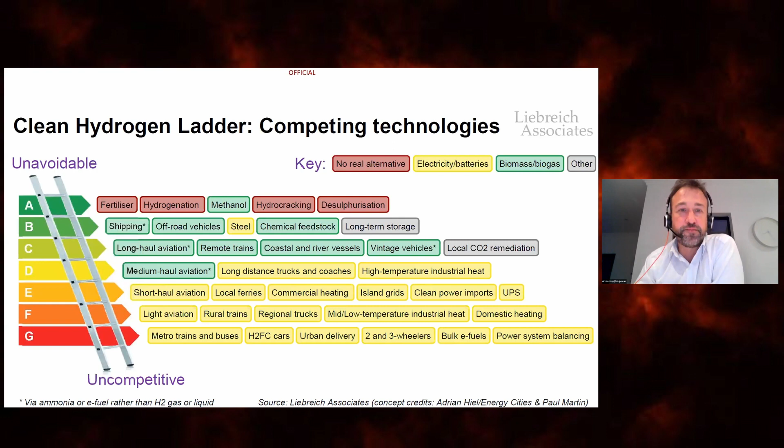In terms of South Australia's hydrogen journey, we started back in 2017 with a green hydrogen study and a roadmap. We had a change of government in 2018 at the state level, and were really pleased to see strong bipartisan support through the release of an action plan in 2019. In 2020, we completed a hydrogen export modelling tool and prospectus, underpinned by a major pre-feasibility study, which I'll show some key findings from in a moment.

Last year, we worked closely with the Port of Rotterdam to look at the feasibility of a South Australia to Europe hydrogen supply chain, and that really proved that distance is not a barrier. Our hypothesis going in was that the shipping distance would render us uncompetitive, but as this and other studies have shown, the shipping cost component to deliver the product over the seas is a pretty small percentage of the total delivered price. So you can more than make up for that locational disadvantage through improved capacity factors from high quality wind and solar resources. Then we had a change of government at the state level this year, and the new Labor state government has brought in a very significant hydrogen commitment, which I'll outline shortly, their Hydrogen Jobs Plan.

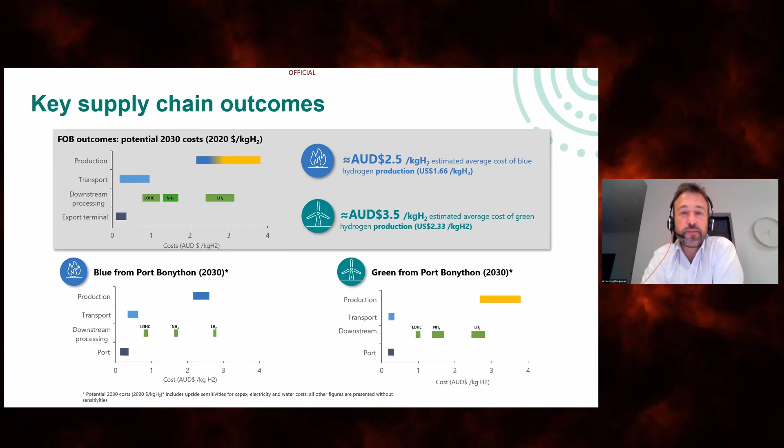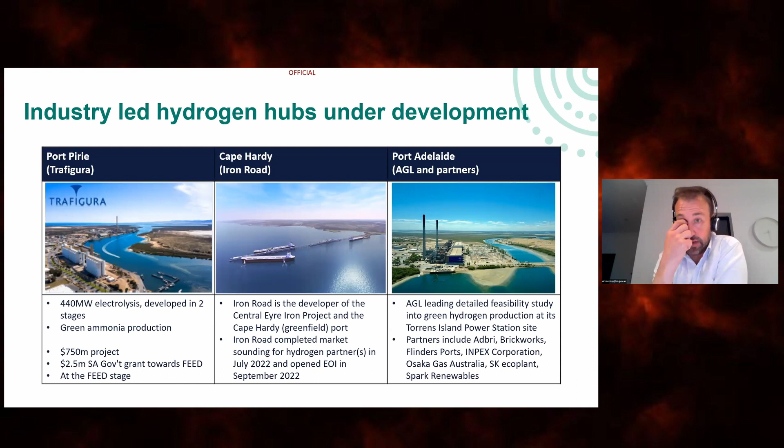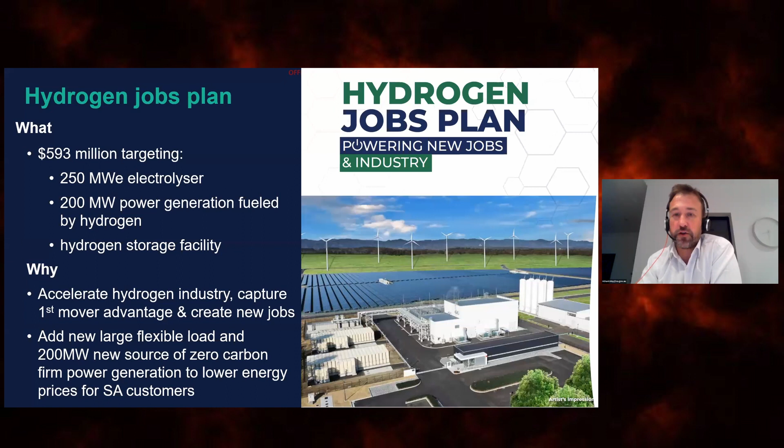That project is underway. The delivery team has been established, there's been site selection analysis, and a market sounding from May to July this year. We are expecting the tender process to commence in the next few weeks, ahead of Christmas.

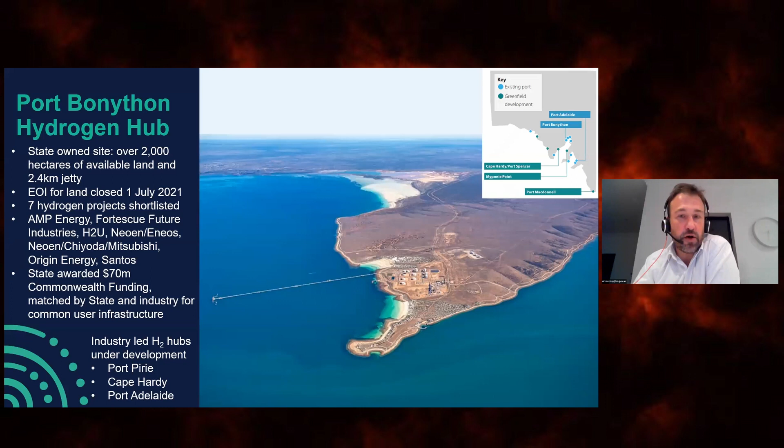In connection with both of those two projects is the business case for a new desalination plant. We are a dry, arid state in South Australia, and new sources of industrial water are going to be key to unlocking further growth in our mining sector as well as our hydrogen sector.

Something we've just started consulting on is some new dedicated hydrogen legislation. The legislative framework we've had to date has done a great job developing 100, 200, 300 megawatt wind and solar farms on privately owned, typically farmland. But we're now fielding significant interest in gigawatt-scale renewable energy projects in our more arid regions of the state, as well as offshore wind.

Particularly to produce electricity to generate hydrogen, and with all the infrastructure requirements around new transmission lines, pipelines, desalination plants, hydrogen plants and ammonia plants, we think we need a new fit-for-purpose legislative framework that allows us to competitively tender out public land, particularly for wind and solar farms, as well as have a one-window approach to government for all the different regulatory aspects associated with these projects. We think that within an Australian context, this will be a national leading legislative framework. That's certainly a key priority and focus for us at the moment.